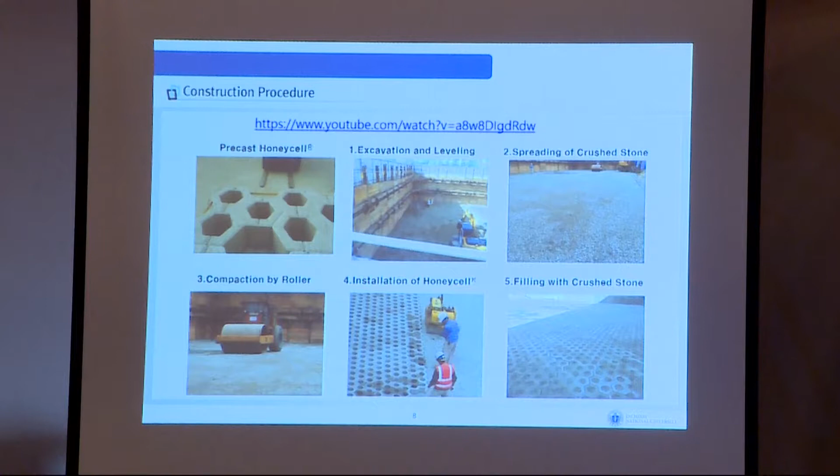See here, then we place the crushed stone, about 30 centimeters, but it depends on the undrained strength of the clay. You do a vane test, you find out the undrained strength, and you can determine the thickness of the aggregate layer. Then we compact it, roller compacted. After that, we place the honeycomb cell, then fill the crushed stone. After that, we can do another consecutive procedure.

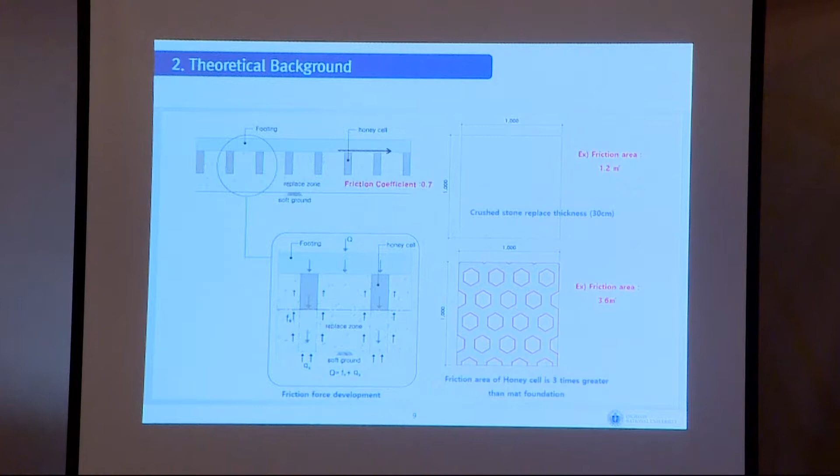Why does this cell have a great advantage? As you see, on the top there's just a crushed stone layer, but that doesn't have much frictional force. But the bottom one, the frictional area in the hexagonal shape in the side wall, about 3.6, compared with the top and bottom one, about 3 times greater frictional force is created by this modular block type of foundation system.

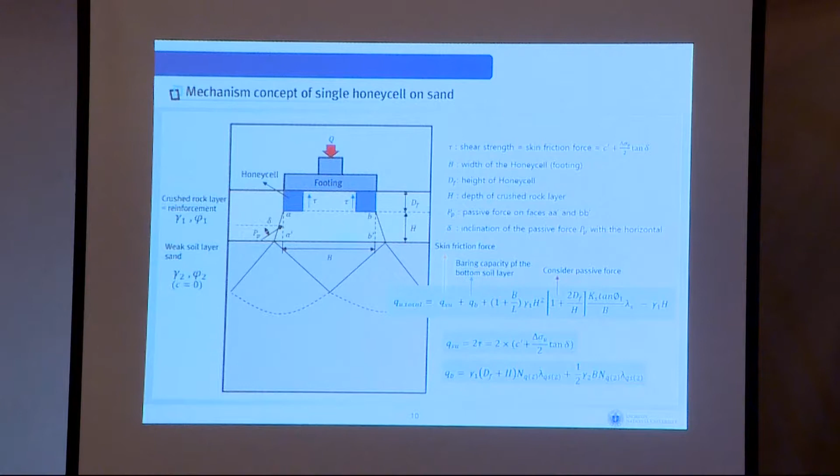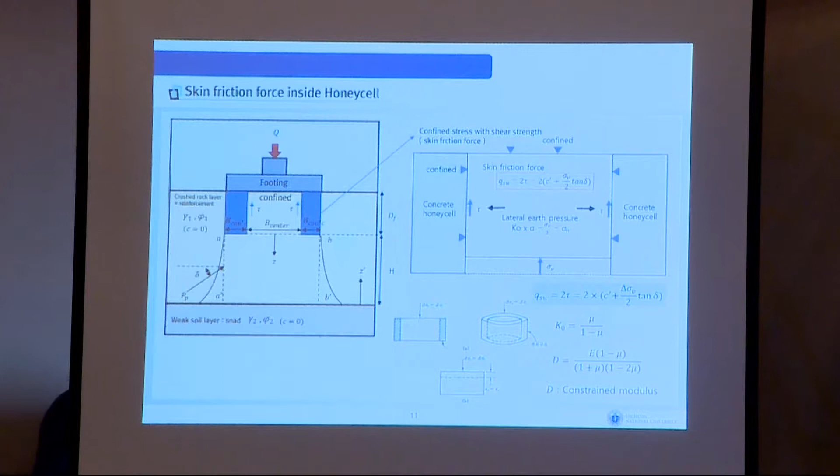And the mechanism of the failure envelope. This is the first term. I think there's a frictional force inside of the modular block. First term, the blocking, and the second term is a weak soil layer. It's a general shear failure for clay and some local shear failure, and the last one, the block, is the bottom of the footing. That is related to the passive earth pressure, PP, with the inclined angle delta with respect to the horizontal.

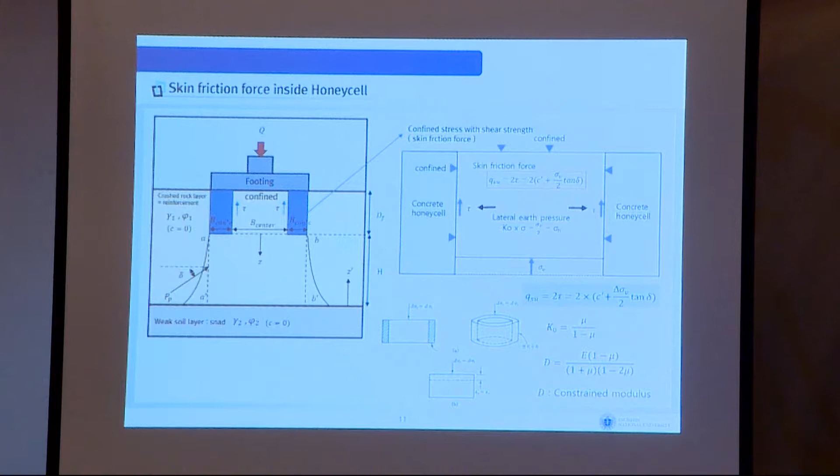And this is inside the block, the shear force created along the modular block inside the hollow space. Of course, under the block we can use the constrained modulus instead of Young's modulus for the bearing capacity. I think this is the typical strong sand layer over weak sand layer. So we don't have any C term, and we also dropped the frictional force inside the modular block to be conservative.

That is similar to Meyerhof and Hanna. They presented the formula in 1978. Meyerhof researched shallow foundations his entire life. That's why my former professor, Professor Das, got some lessons from Meyerhof, so he did shallow foundation work. We can combine all those formulas together and present the bearing capacity formula. As you notice, Ks is the punching resistance along the shear failure at the bottom of the aggregate layer, and you can get it from the textbook.

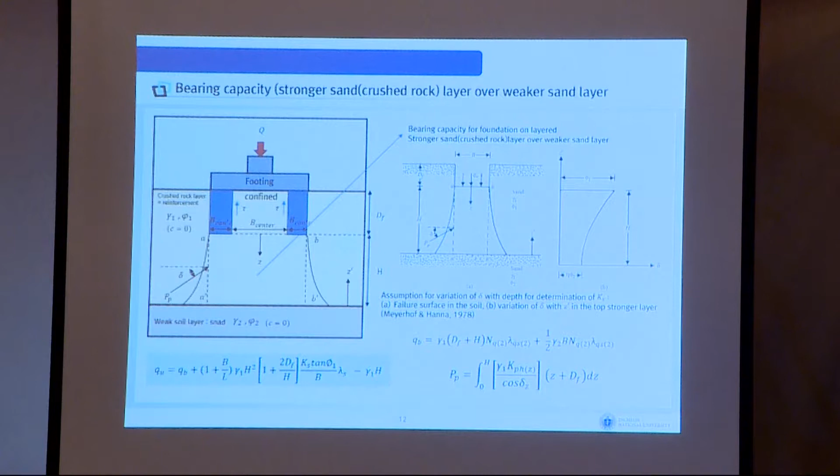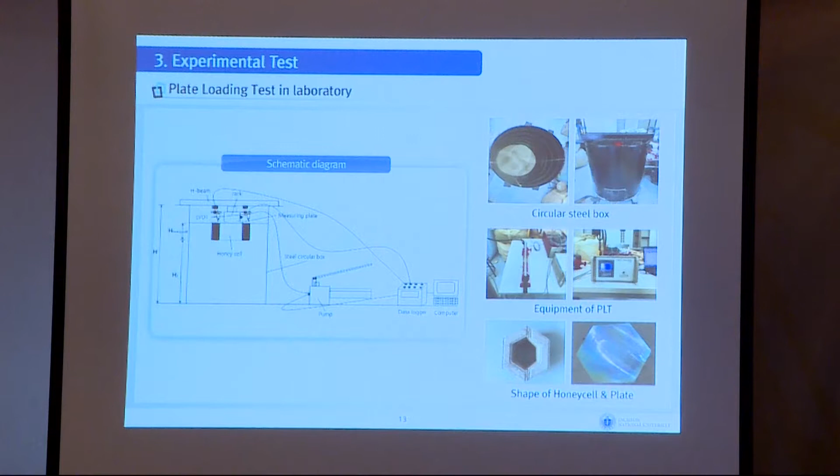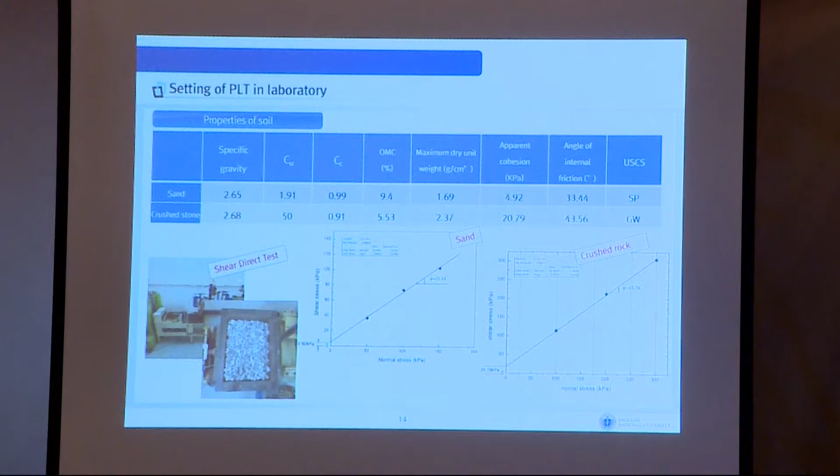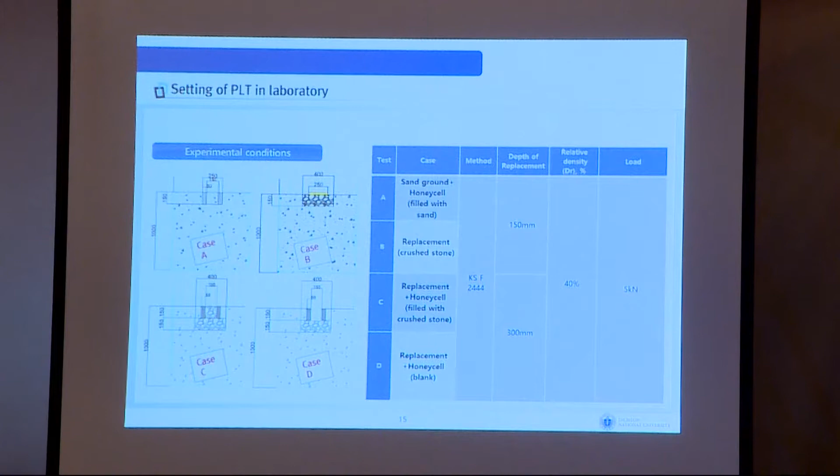So we used all these designs, and we have several different categories of reinforcement. One is just Honeycell with sand filling, the second one has crushed stone in the bottom layer and crushed stone inside as well, and in the last one we didn't put aggregate fill in the hollow space. Then we found our bearing capacity.

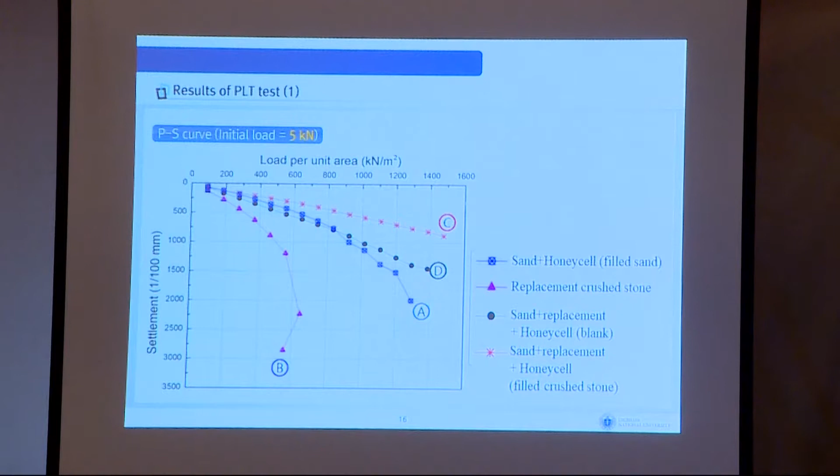I think the first one is normal practice. Model C, which has crushed stone fill and also crushed stone in the bottom layer, gives the highest bearing capacity, and the settlement level is very small compared with the other cases. We found all of the above bearing capacities and lower settlement levels. And we did an in-situ plate load test, 1.5 meter by 1.5 meter.

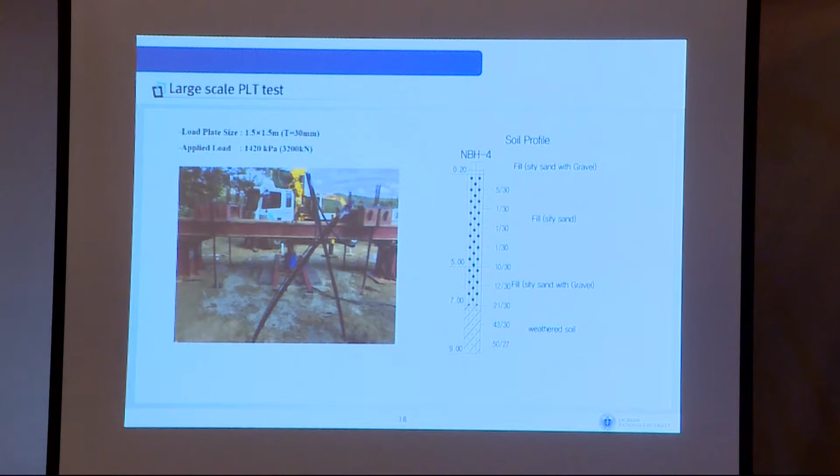And you see the SPT N value is very low, 1 or something. And then we compare the original ground, which gives almost the same ultimate bearing capacity, but the original ground gives a higher settlement level compared with the Honeycell foundation system.

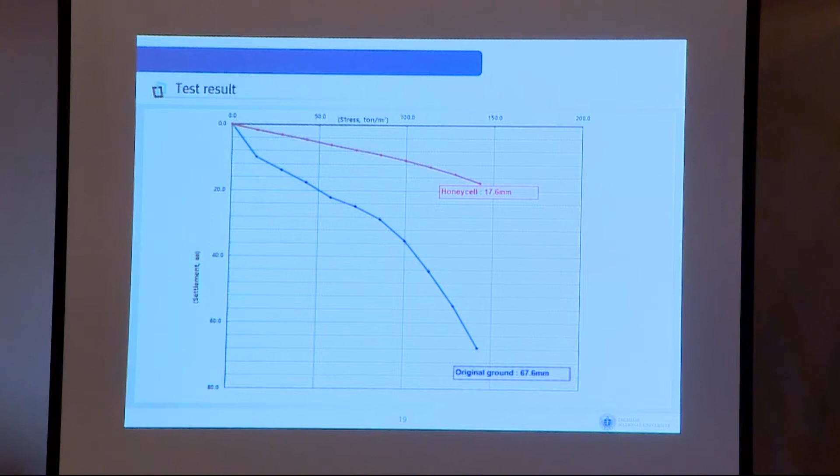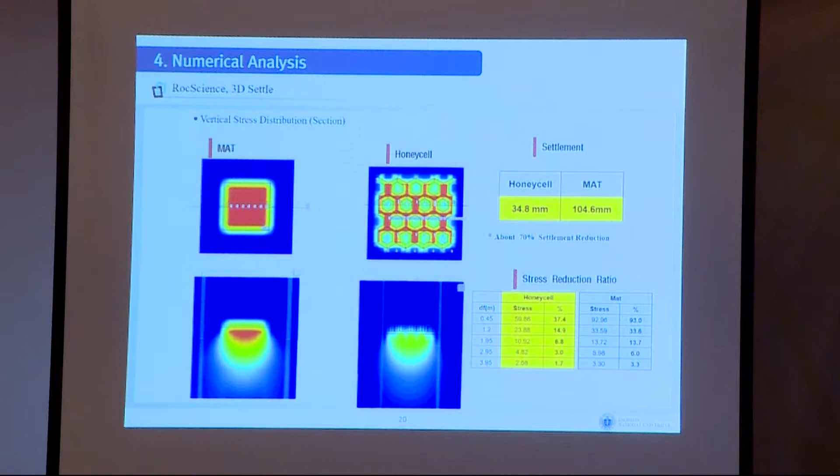And also we did some numerical analysis, and we compared the mat foundation system on the left-hand side, which has a great amount of settlement compared with the right-hand side, Honeycell. And also the stress reduction ratio: Honeycell gives higher reduction compared with the mat type of foundation system, and also the spreading.

Honeycell has very much spreading of the pressure distribution compared with the left-hand side, which has a much greater vertical direction of stress distribution, which creates a much higher settlement level compared with the other one. And also this is the same theory.